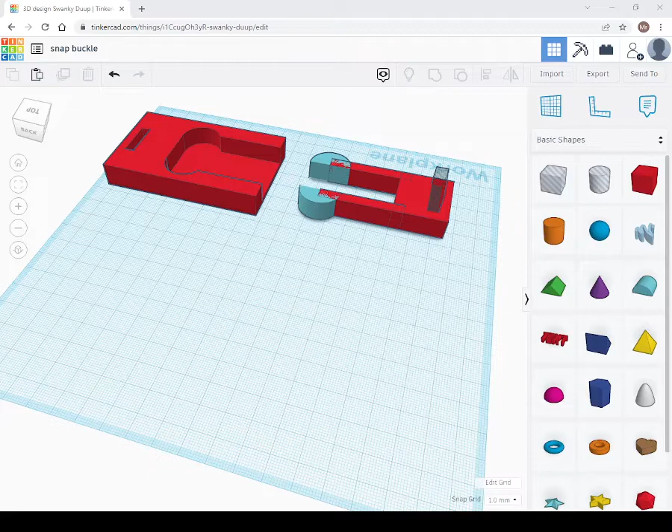Folks, I'm going to show you how to make a very basic snap buckle to be 3D printed.

I'm going to start off straight away with one of these lovely half moon shapes, and I'm going to rotate it 90 degrees, and then I'm going to make it a height of 10.

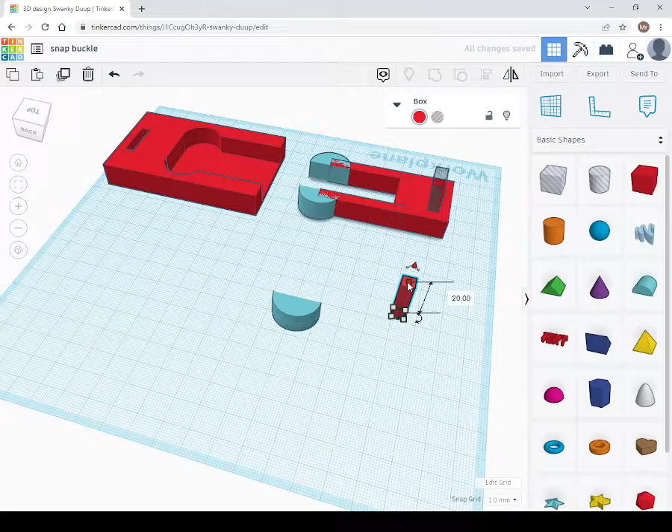Then I'm going to bring in a square block. I'm going to make that, let me check my measurements, 40 by 10, I think it was. No, it was 5 by 5 at the bottom. And then, no, it's 10, and the length I believe was 50, not 5 but 50. So let's make that 50. Let's check that again. Yeah, it's 40, so I'm going to make it 40 then.

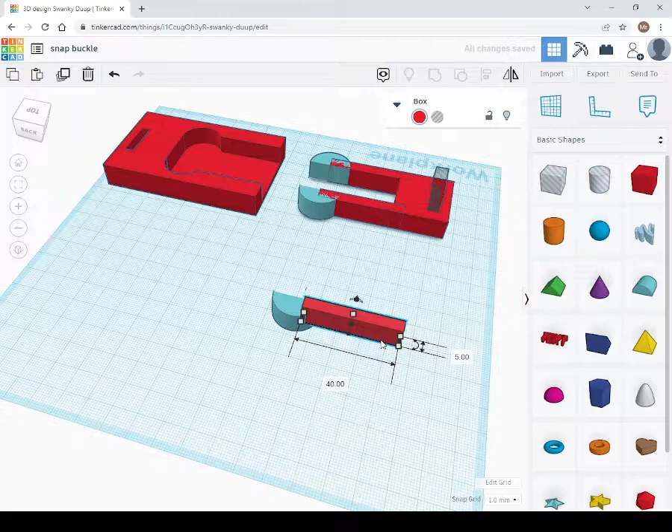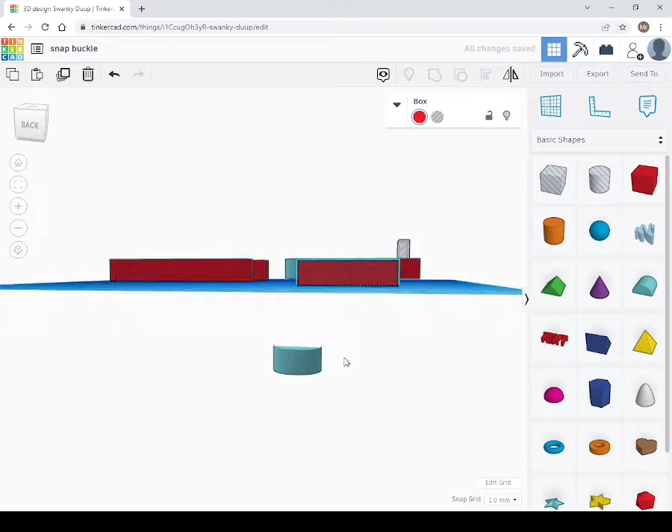So how do we put these two things together? That's the question. Also, what's happened is because I rotated it, it rotated through the material, so I'm just going to bring this up to 0. That's very important. Use the cone if you want to bring things below the work plane. Watch this, that's now below the work plane. If you want to bring it back up again, use that cone and bring it up, and you'll see it goes to 0, or you can zero it using your keyboard.

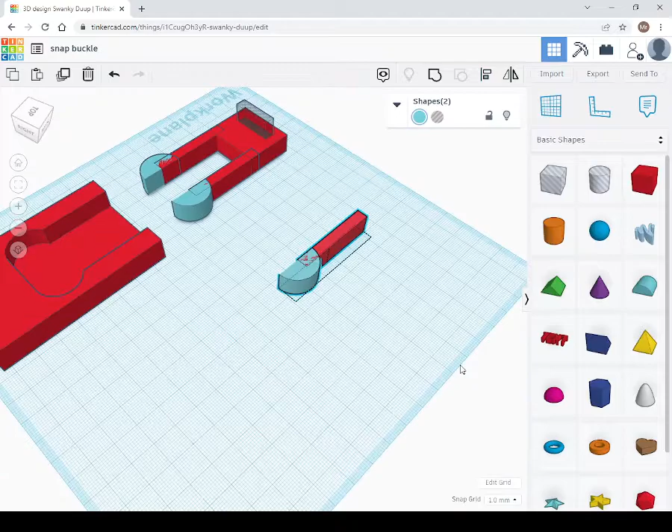This is actually in a really good place, but I want to make sure it's aligned properly. I'm selecting this by drawing a box around it, and I'm going to use the align button. Now, because this is grayed out, it means that it's aligned perfectly there, and it's in the right spot as well. But what happens if it's not in the right spot?

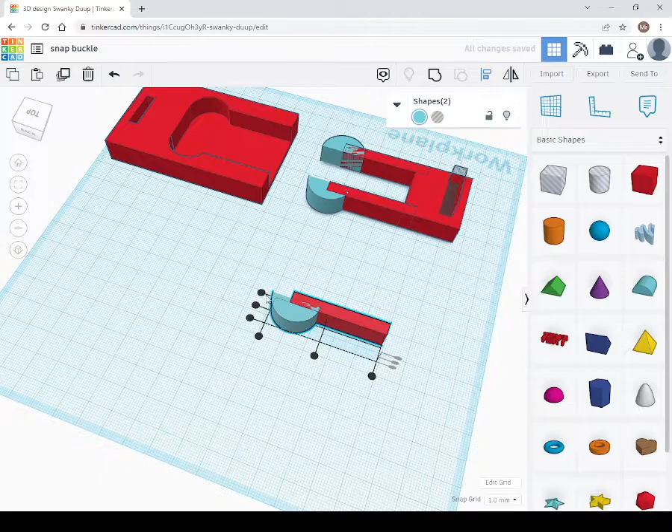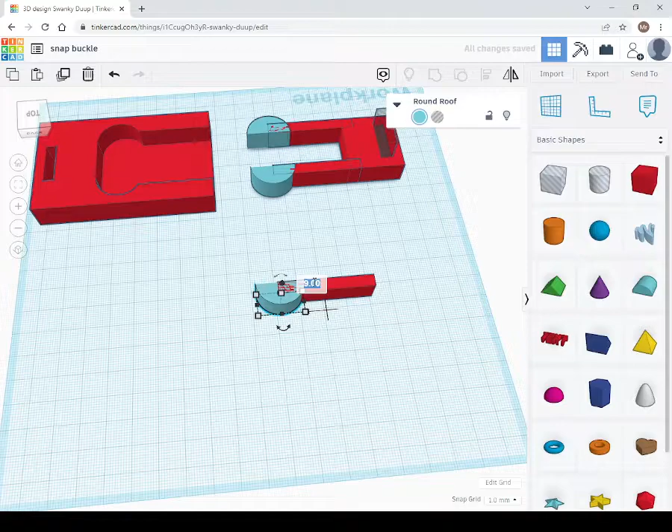Now, if I remember correctly, I can just look at this half moon shape, and I can see that that's 20. Now I just want to draw this along by 10, so I'm selecting that shape only, not this shape, but this shape, and I'm going to use the shift key, and I'm going to draw this forward, and go forward 10. Okay, you could hear me typing that in on the keyboard.

Right, that's fine. So next I'm going to just group this by using the square and the circle that are joined together. That's great, that's now one piece. I'm going to look at this back piece here and see how big this is.

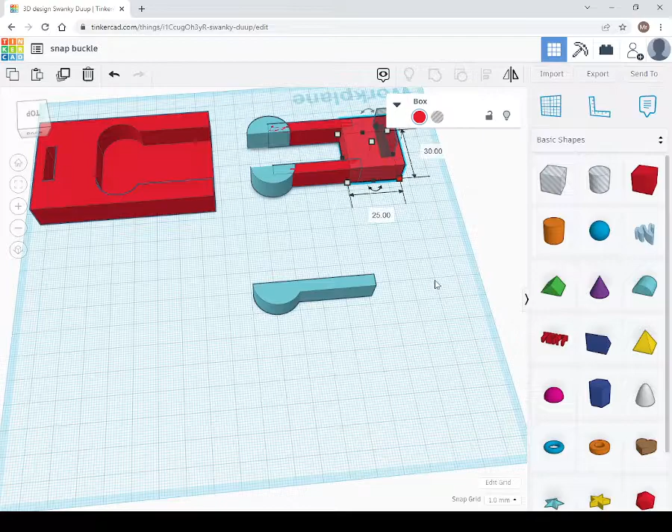So that's actually 25 by 30. So what I'm going to do is I'm actually going to just draw in a box now, which is going to be 20 by 30 this way, and it's the same height, which of course is 10. So make that 10.

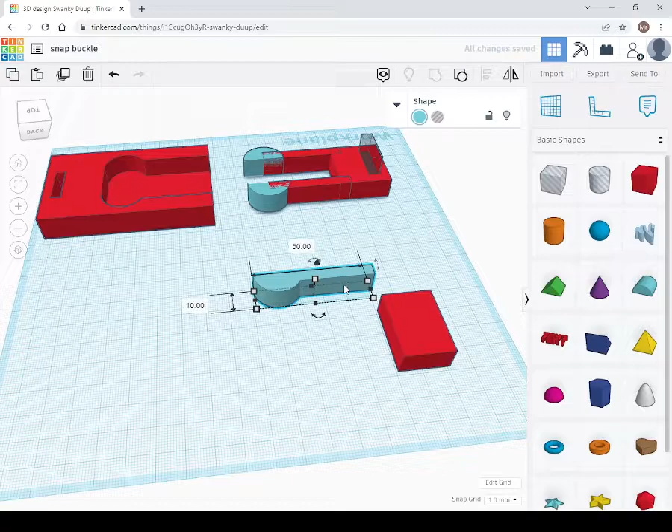And I'm going to very simply duplicate this by using this duplicate and repeat button, and then I'm going to just draw this along here. I'm using the shift button to get things moved nice and straight, and it's sort of quite intuitive. You can see here that it's just lined everything up really nicely for me.

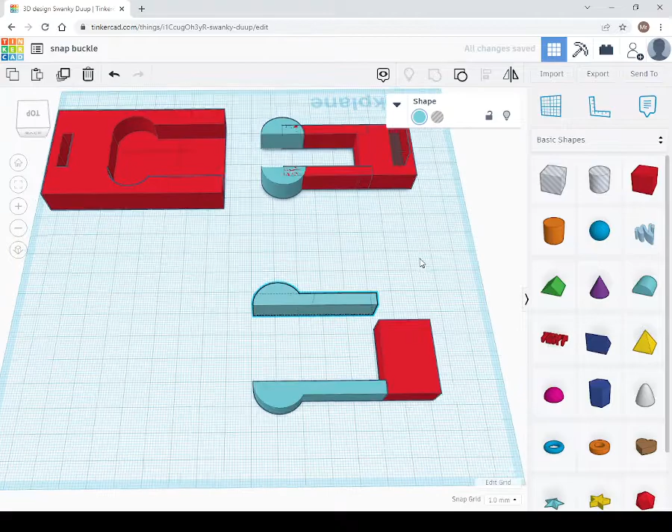I'm going to select this, and I'm actually going to use the mirror. I'm going to mirror it this way, and I'm going to draw this along to here. Oh, that fits in perfectly as well. Right, it kind of snaps a little bit, which is really nice. Just going to have a look at this.

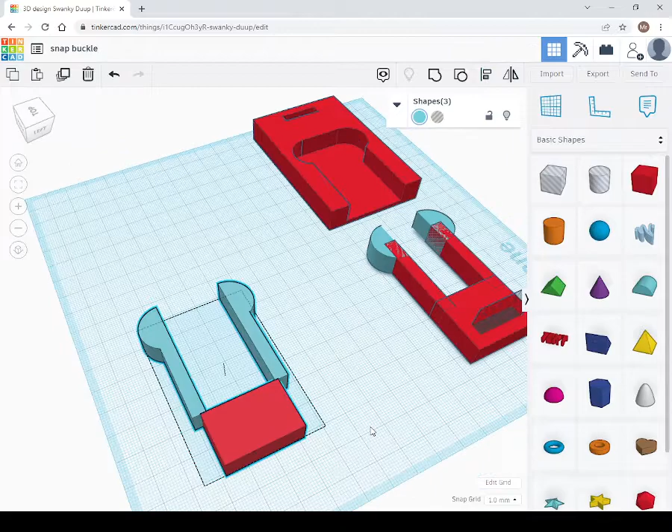Now, it's going to be a bit problematic if it's not snapping together properly, so I'm going to just pretend it hasn't, that these are kind of in weird places, and I'm going to just try aligning this again. So let's do the alignment. So what can we do with this? Okay, so we bring everything together there.

Okay, right, let's use the shift button and move this along to here. Oh, I have to deselect everything. Let me just select that one and move this along. That's going to go along 25, I think, yeah, let's make that 25.

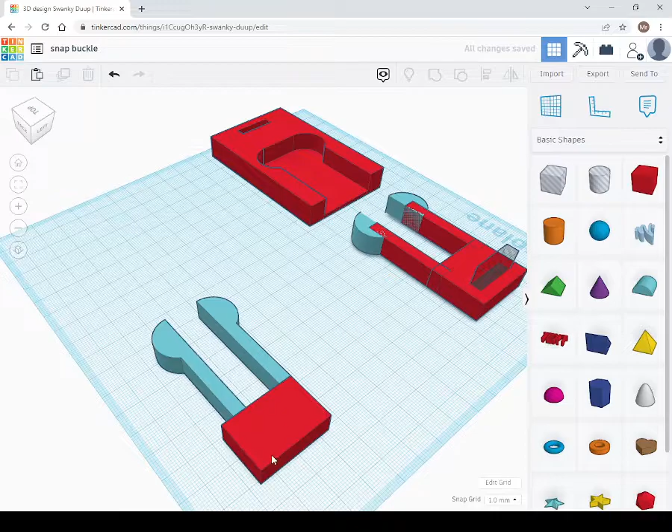You can kind of work it out, it's in multiples of 5, because this block at the back, if you remember, is 30, and this one here is 5, like 5 thickness at the end. So I'm going to just move this along another -5. You can type in the minus button, it's next to the plus button, -5, and that's great.

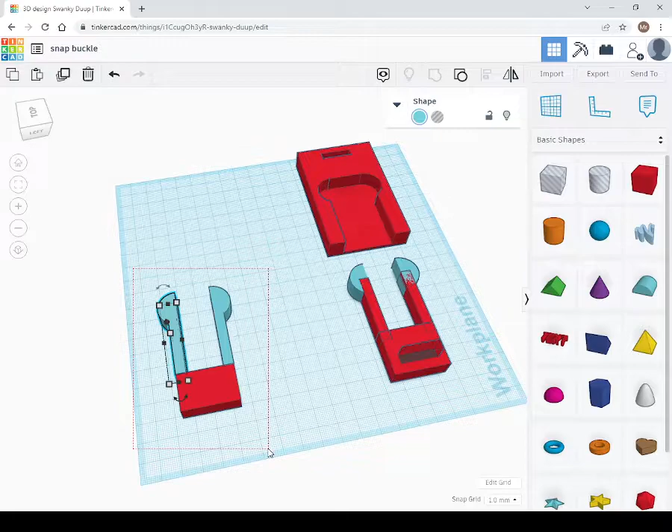That's once again aligned. So I used the align button, I aligned everything to one side, left side, right side, and then I managed to put it together. Now I'm just going to group this again. That's now my sort of snap clip.

Now you notice here I've done this box, which is a whole box. I'm going to make this whole box 5 by 5. Oh no, that's going to be, I'll leave that 20. I'm going to make that 5. I don't have to change any of the other measurements, do I?

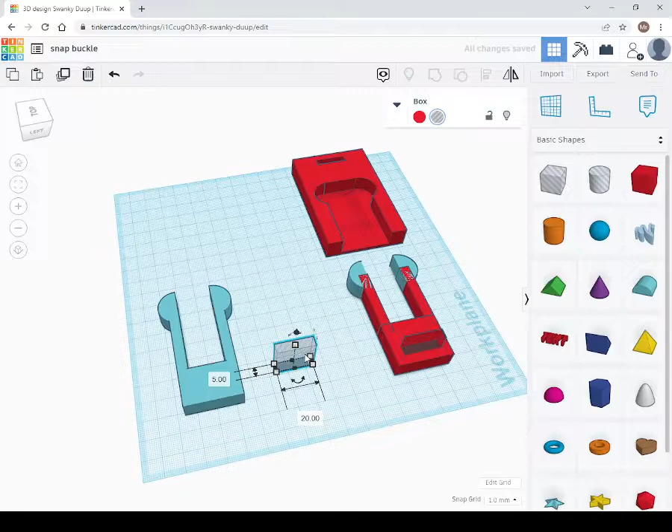What I'm going to do is align these by selecting them both. Let's align them, let's center them. And I'm going to bring that right to the back. Now once it's there, I can select it and use the shift button again to move things in a straight way. Oh, I'm enlarging it by mistake.

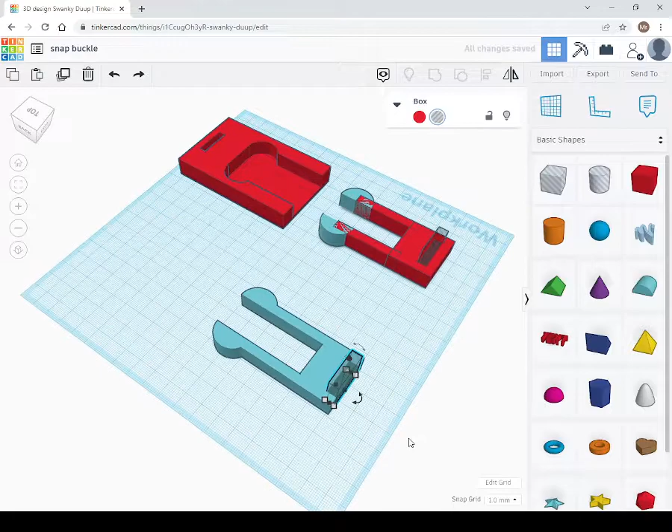So I'm going to use the shift button, I'm going to move it along by 5. And I'm happy with that. Okay, I'm going to do one final group. And that's my snap clip done. Brilliant, she looks better than my other one.

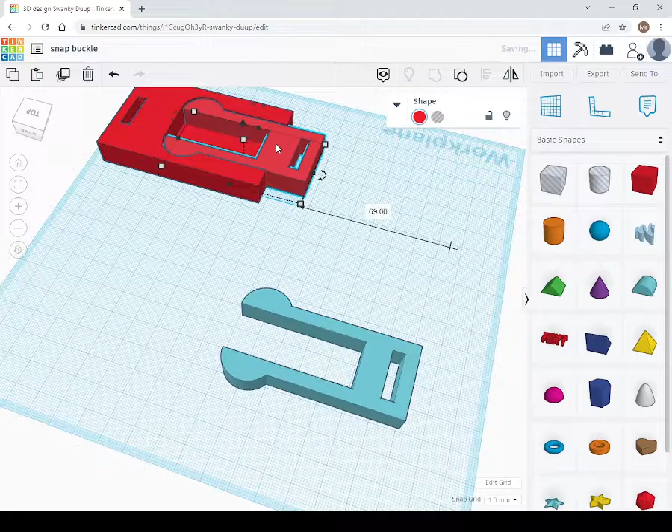Okay, great. So we need to make this shape here for it to sort of snap into. So it's going to be snapping into that, and hopefully the material won't break when it goes through. I usually have a sort of center tongue that goes through. I don't have that because for the expediency of the way it's going to be built.

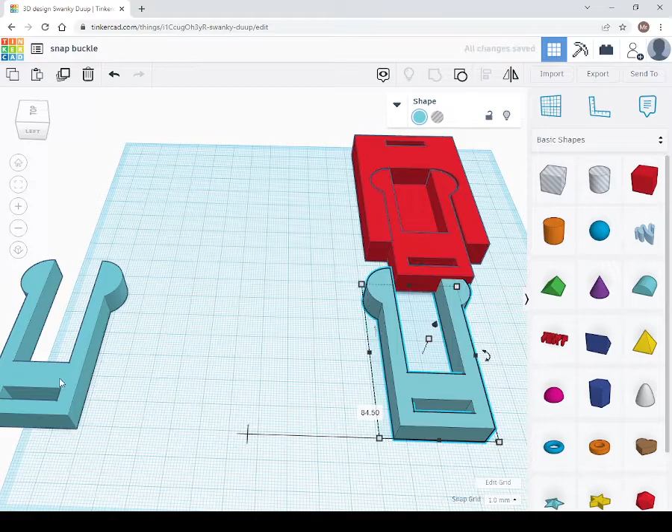So what I'm going to do is duplicate this. I'm going to move my duplicate away. Okay, just a little bit for it. I'll move this over actually here. Doesn't matter if it's going into the other shape.

What I'm going to do with this now is just enlarge it slightly. So I'm going to enlarge it by 2, 42. You know, it gets slightly bigger. I'm going to make this 72. Alright, okay, so I've made it longer and I've made it a bit kind of wider, haven't I?

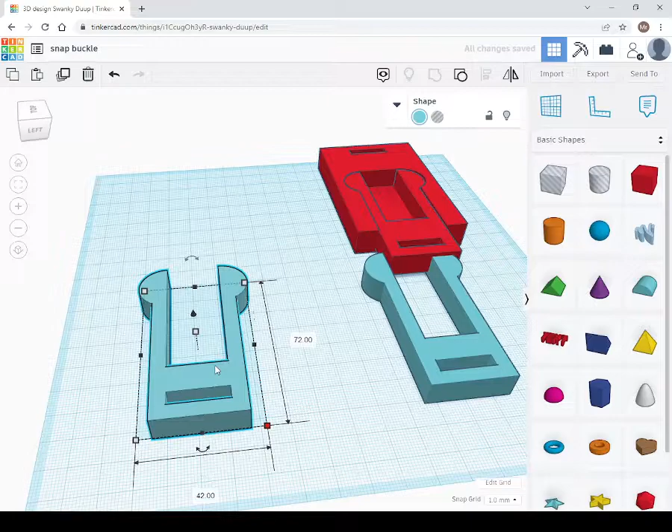And I'm going to take a block. Let's say this block here, what's the measurements on that? That is 50 by 80. Once again, it's a height of 20, and it's going to be 50 by 80. So that's 50 that way, and it's going to be 80 this way.

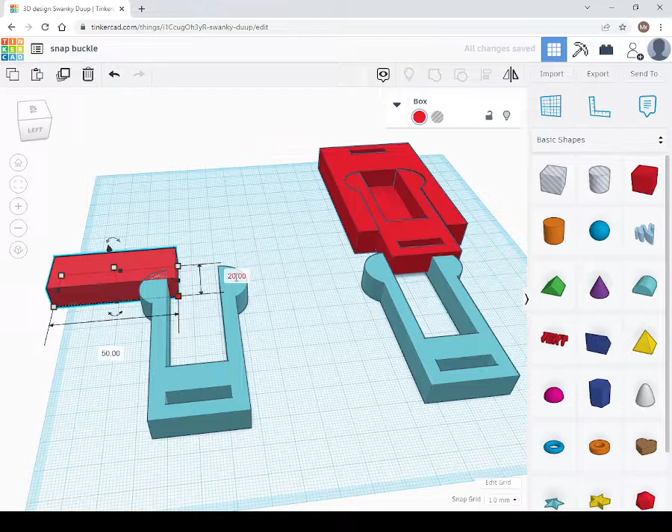Brilliant. Okay, let's center everything again. But before we do that, let's just go into the properties of this and turn it into a hole. Okay, let's get the two of these. Let's center them, center them. Ah, that's too far in.

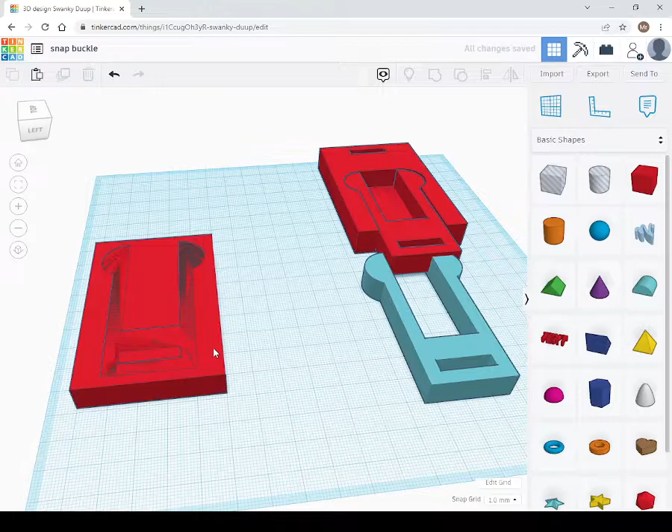So what I want to do with this is actually use the shift button and move that back a little bit. And I'd say to there is enough. 25, yeah, 25 is the distance you want to go. Okay, I'm feeling good about this.

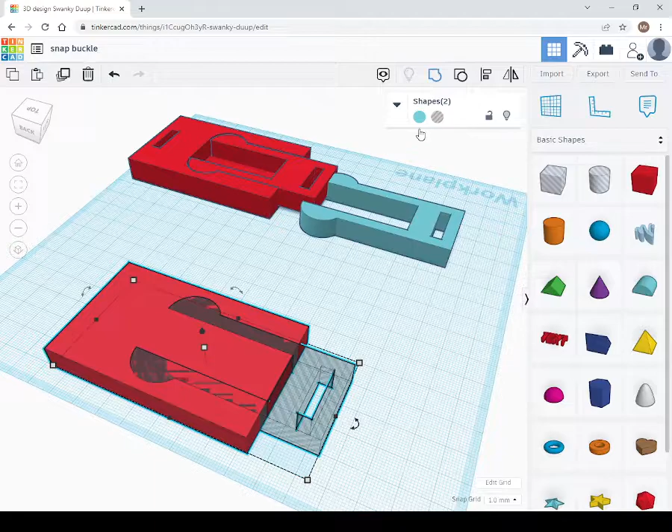And I'm going to group it. But to group it I need to select both shapes by, you've guessed it, drawing a box around both and then grouping. And there you go, you've got a hole cut into it which is about the right length.

Now we've got this tricky bit here sticking out that we need to sort out as well, so I'm going to just drag my box in. Now if I remember correctly, the gap between here, well, let me see, what was that? I believe it was 20, but this to here, I think that was 50.

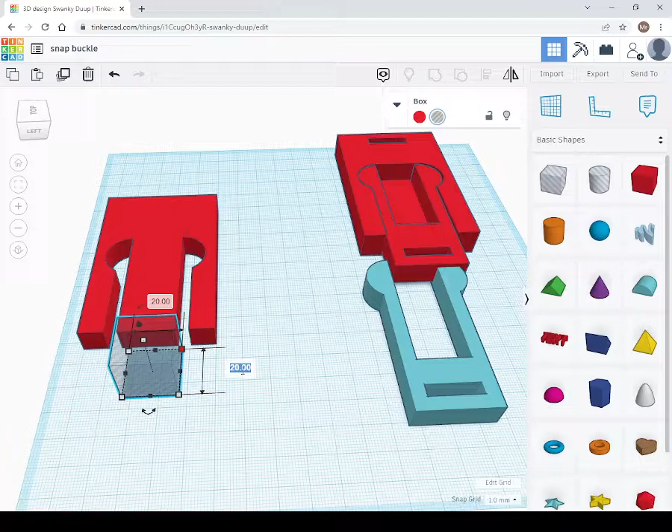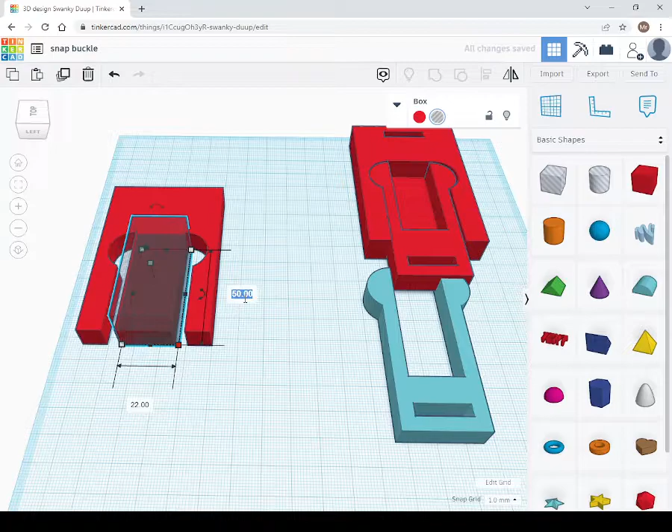Let me just try 50. I think that's right. Let me just push it in, and something's changed. What's changed? Okay, I think the whole shape has changed a bit because it's been increased by 2. So I'm going to make this 22, and I'm going to make this 52, because you remember everything got increased.

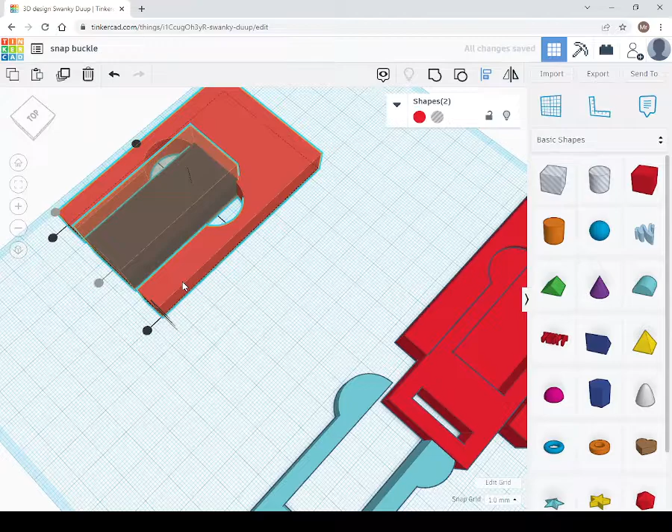Is that too much? It might be. Maybe I'll leave this as 50. Let's see how this works out. I'm going to select both and align them just to check. Center, and I'm going to go to endpoint. Ah, yeah, it is a little bit big, isn't it? So let's click on that box by itself and let's try a measurement instead of 51. See how that works.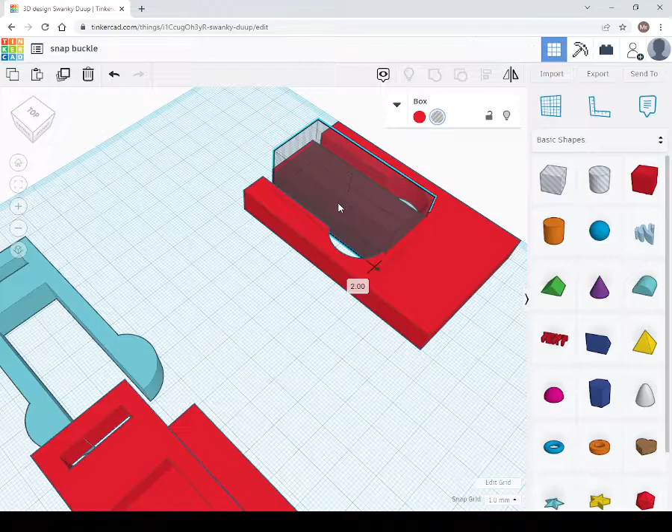Okay, it's gone forward slightly. Let's move it back a bit. We've gone back 2... too much, it's a little too much. Let's go forward 1. And I think that's good.

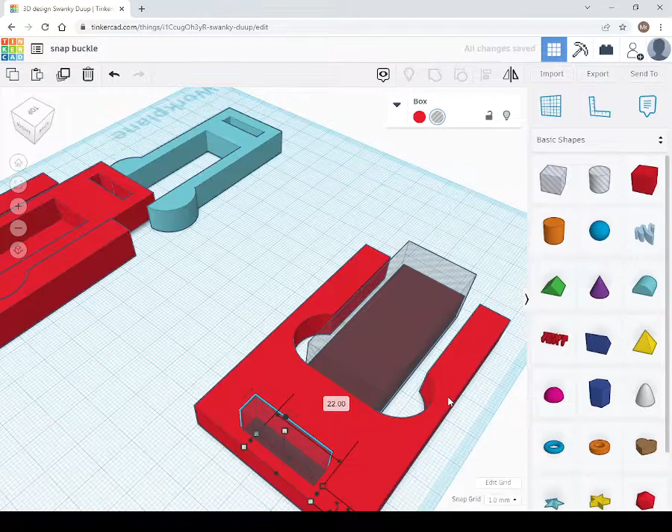Now what I'm going to do as well is something a little bit lazy. I'm going to push this, duplicate it, push this forward, and make this 5. There we go. Because that's already sort of centered, I can just duplicate it, take a bit and push it forward.

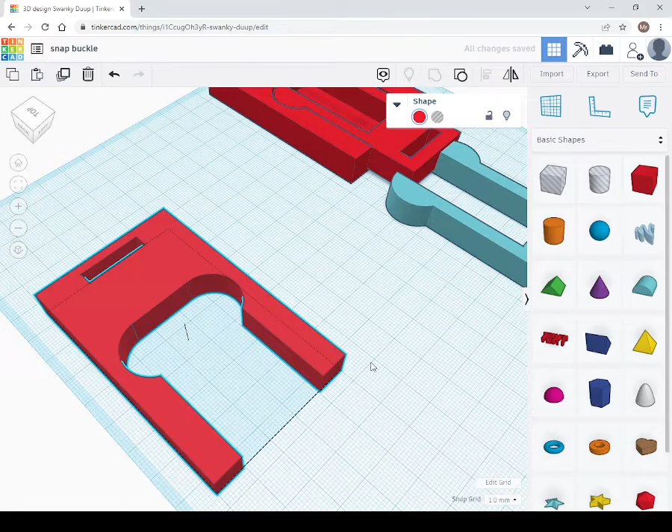And hopefully, using the shift button and the roller button here to orbit. Group this. Looks pretty nice to me, looks fine. But if I put this clip in here, isn't that just going to...

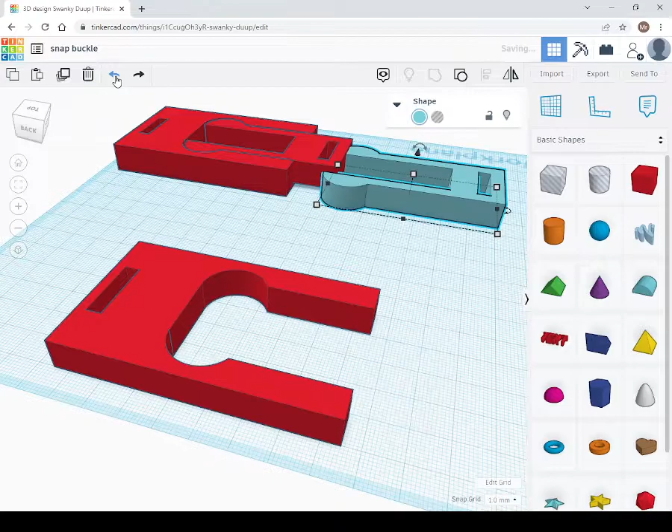We test it and see that there's a gap between the two, yeah? Isn't this just going to fall out, or fall forwards? So really what you want to think about as well is having a base for this.

Now if you remember, it was 50 by 60. So we'll do 50 by 80. I'm going to do 50, 80. And what we'll do is do a height of 2.

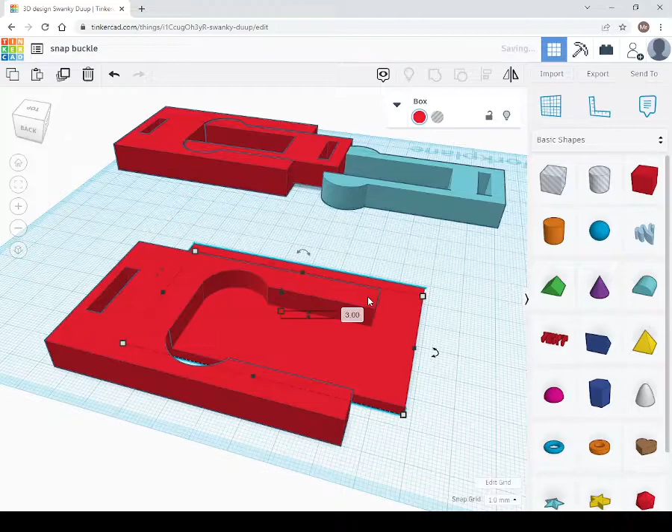Let's make it 3. Right, now these two, they're kind of stuck together, aren't they? So what I want to do is actually raise one up, which is the base. I'll raise it up by 3 using the cone. And then I want to align these two.

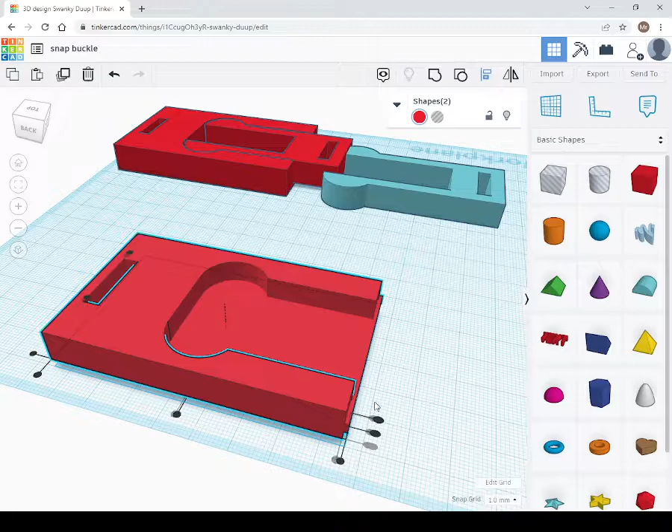Oh, hang on. I didn't select both, obviously, otherwise I'd get this align option. So let's do this, and let's do that. Here we go. We have to center them this way as well.

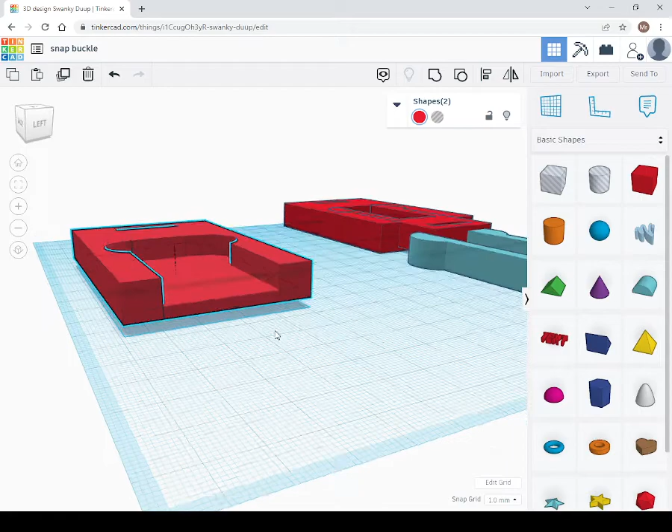Lovely. Okay, and that is actually, is that floating off a little bit? I think it is. Did we? Oh, I think I raised up everything by mistake. That's fine, it's aligned anyway. So I'm just going to drop this back down by 3.

Oops, I just moved it around a little bit by mistake. Let me have a look. It's sitting flat on the work plane. Let's just check it by trying aligning it again.

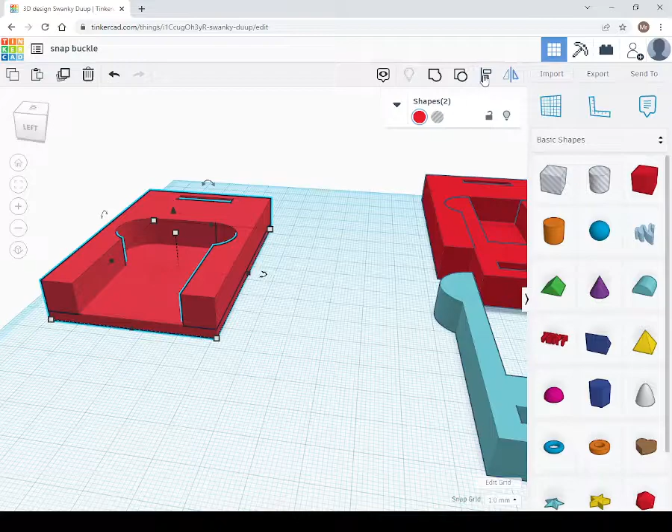Aligning is actually just the best thing about this. Let's just have that. No, we want that up. Oh, undo, undo, let's just come off it and undo that twice. I think that's actually aligned perfectly. Yeah, that's fine, I was just kind of being overcautious.

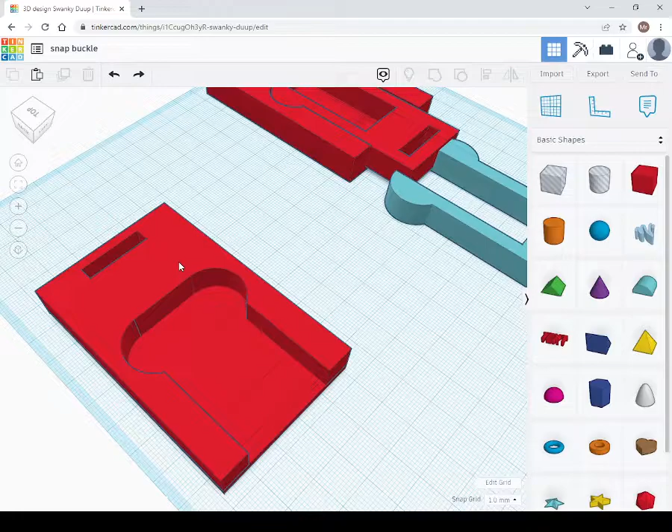Right, I'm just going to quickly ungroup this. And you see this box here at the end, I'm just going to select that and push that down by 3. It's taller and now it's actually gone through the bottom, because otherwise you're going to end up with a solid piece where there needs to be a hole.

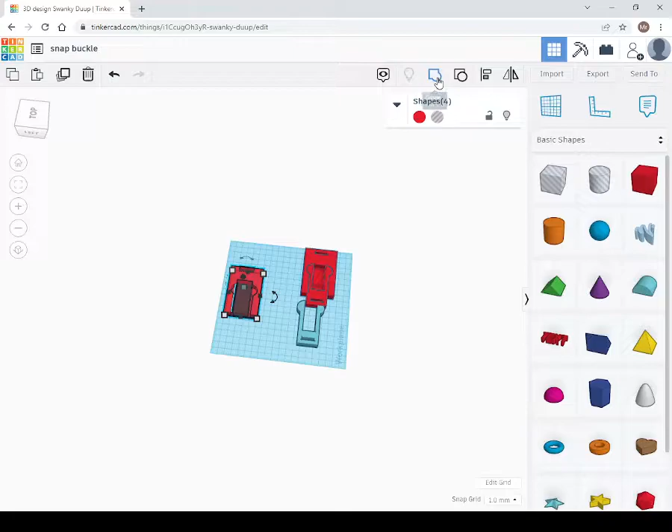For the clip, for the thread to go through. Now you need to make your own measurements on this. It might be that the width of your strap is bigger, but you see there I've made that hole. You see now I can actually get it to thread through some sort of a strap.

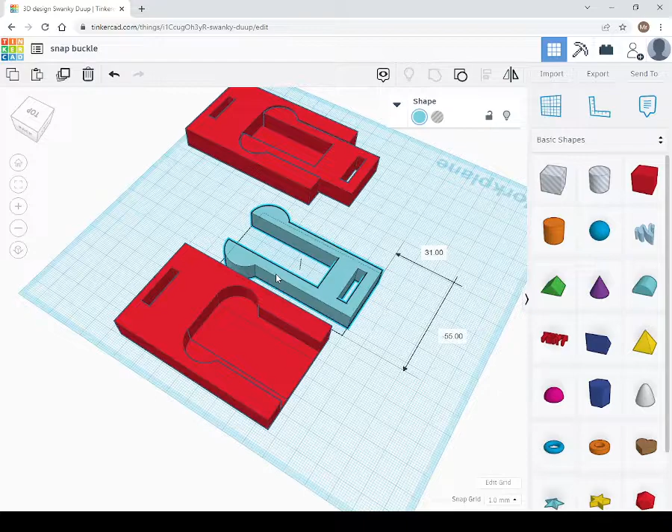This is on the work plane. I've already checked this. You can check this again, quality control wise, by aligning it. Let's have a look and see if there is a little gap. There should be a little gap between this and the other thing. So I'm just going to draw this up by 3 and check to see there's enough of a gap.

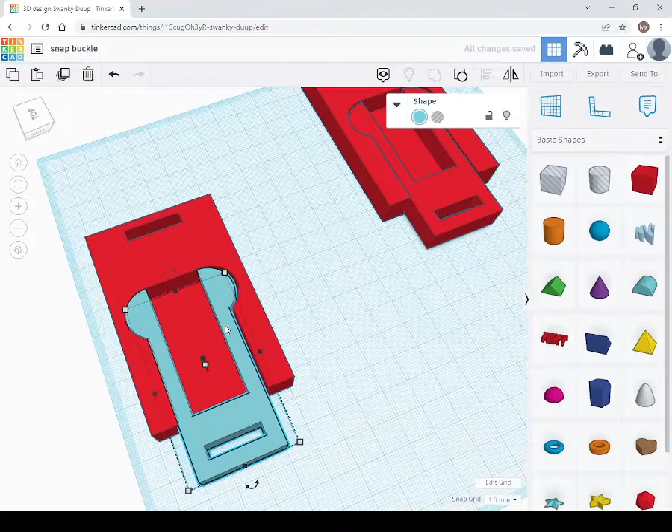Now what will happen when this goes in is that these will push closer together. They'll pinch together and then they should snap into there.

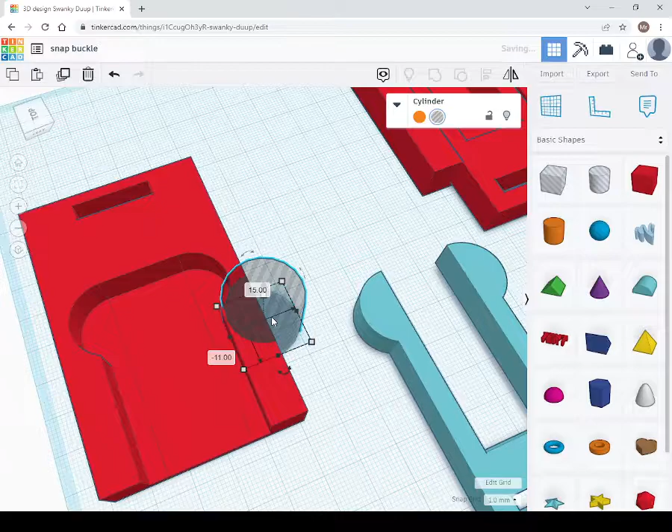This by no means is perfect. I mean, these edges here should be a bit more rounded. You could possibly do that with a hole, so for example putting in a cylinder like around about here somewhere, or somehow taking a curve out of the end there. But in any case, this should, for all intents and purposes, work.

Right, I'm going to place the two together. I'm going to go to export, and remember to export it as an STL file for 3D printing.